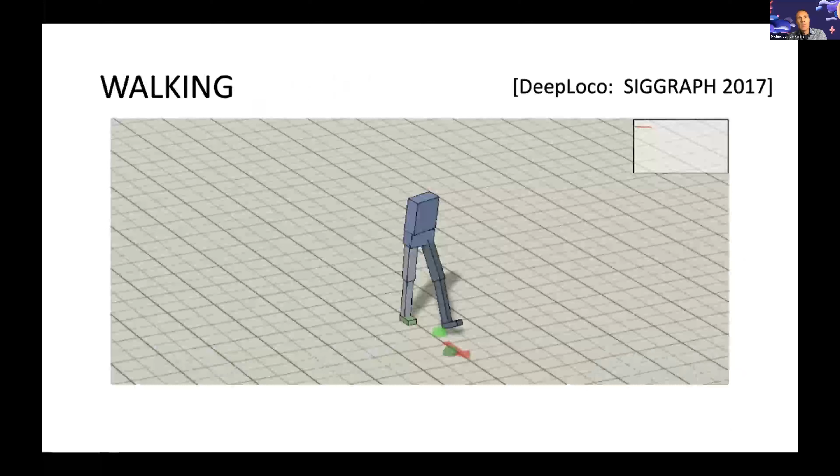This was just a very early test that contained a single motion capture clip of a lower body just walking forward, and I think we also had some data from shallow turns, trying to imitate those objectives. That's part one of the objective, and a second objective is trying to hit these next two footstep locations.

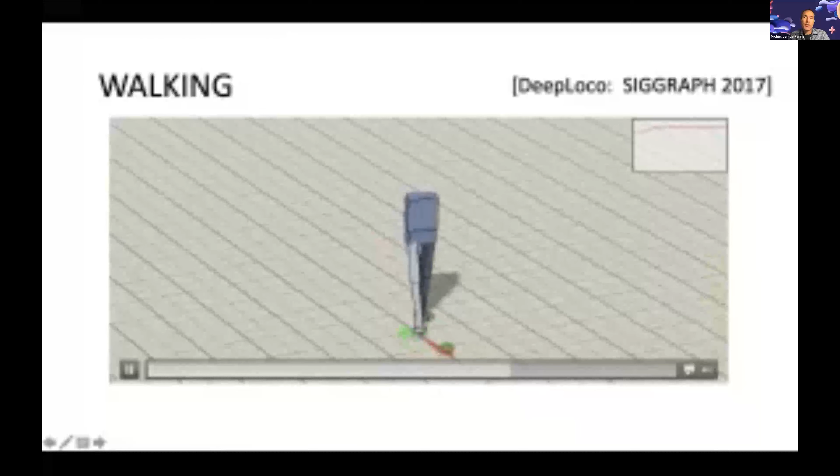And so you can steer this thing. So the task here is to hit the next footstep location, and it's also given access to the footstep location that's two steps into the future, so that it knows if it needs to prepare to turn or prepare to go straight, etc.

So this is already really nice. We're getting some really natural looking walking, and indeed we can put this into interesting environments where it's responding and trying to maintain its balance as it walks over these moving conveyor belts. So yeah, we're really starting to get some interesting behaviors.

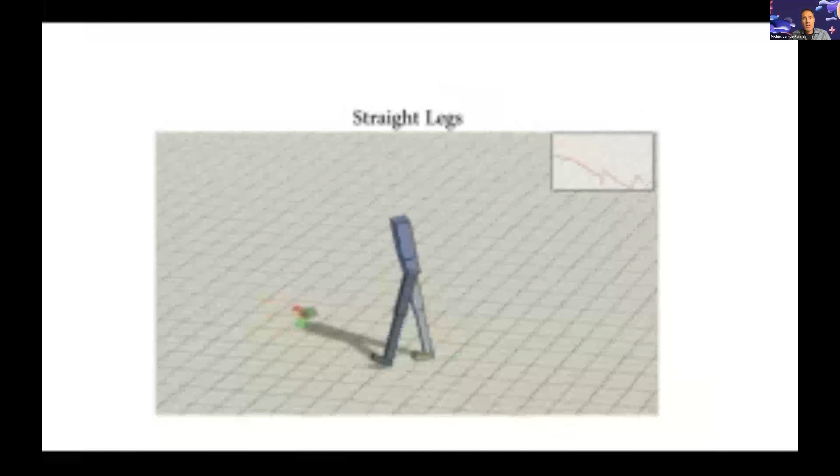We can stylize this. So here we can change the objective target to walking with a straight leg. We're restricting the physics to have one or two straight legs. The nice thing is, as an animator, you can just come up with these constraints, add them to the system, and retrain a new controller, so you can get a variety of interesting motions. So I'm not going to dwell too much longer on this.

A basic question is, okay, does this extend to more complex motions? This is what we did in the 2018 DeepMimic paper, where now we're going to have a state description that is described by a vector of 197 numbers, so it's a more complex full body character. And then the action space is basically a set of 36.

In this case, it'll be controlled with basically PD target angles, but this can also work with torques. And yeah, so you have to produce this set of 36 numbers that controls the actions.

So if you control a motion without a target reference motion, just with a pure objective, then if you're really lucky, you'll get a fairly good looking motion like this. So I would argue that's already fairly realistic.

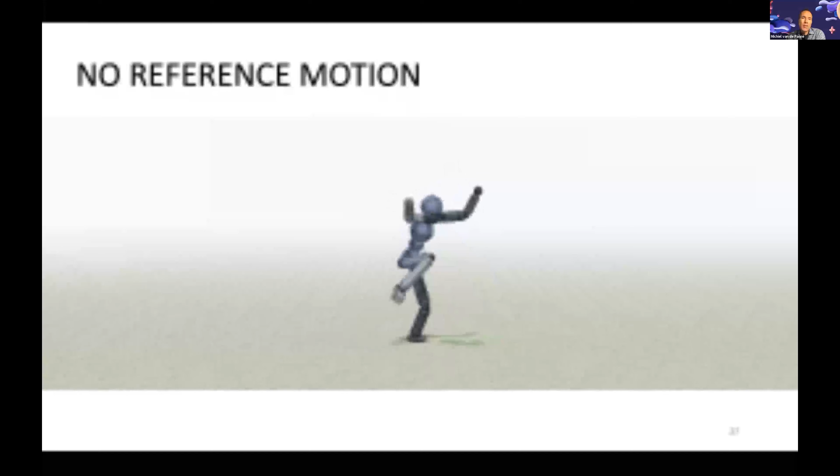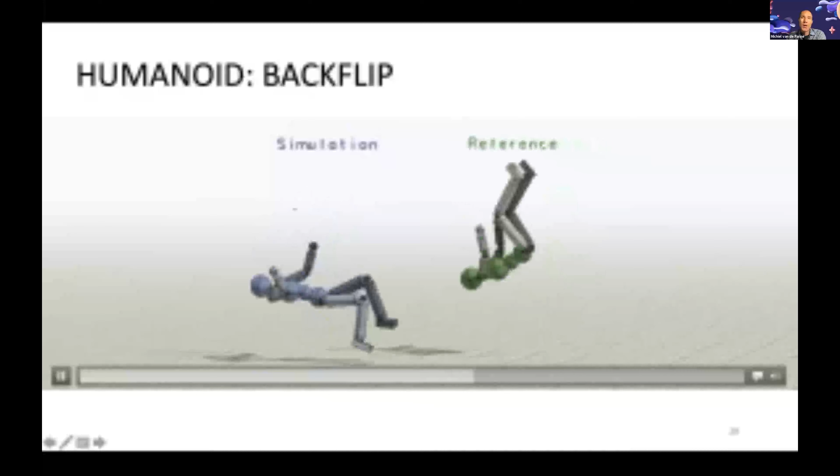But one of the problems we ran into was that for certain types of motions, like a backflip, which is shown in motion capture on the right, it's unable to imitate that on the left. So basically it falls on the ground, and then it's struggling to continue to imitate the backflip while lying on the ground. So it's basically stuck in a local minima during the learning process.

So to fix this, one of the things you can do is as soon as it falls down, you actually stop the simulation, so that it cannot gain further rewards from trying to imitate the backflip while lying on the ground. Because it can still try to imitate the approximate poses of the backflip, and it'll get some partial marks, if you will, for moving its joints in the right action while lying on the ground, but that's not what we want.

So if you do what's called early termination, then you fall into a different local minima. Here you'll see on the left, it's basically pretending to do a backflip, but it doesn't do the backflip, and it goes directly to the landing. It basically says, I hope you blinked, because it still kind of looks like the backflip overall on the right.

So to fix this, we're using something called reference state initialization, where, I don't know if you can see on the top right here, you really want to initiate your simulations at various points along the backflip, so that it really learns how to do all stages of the backflip, and it eventually learns how to connect all these together.

And so if you put these together, then we can successfully do a backflip, and a variety of other really dynamic motions.

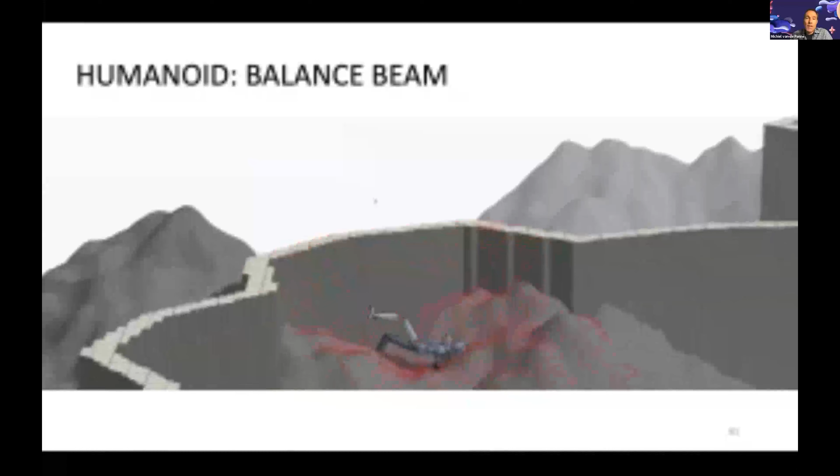We can also condition the policy on a terrain map here. So here it just happens to follow this path, because the only way for it to successfully continue imitating the motion capture data is to follow along this path. It basically always wants to walk straight, but it can't, because it learns that it will fall if it steps off the path.

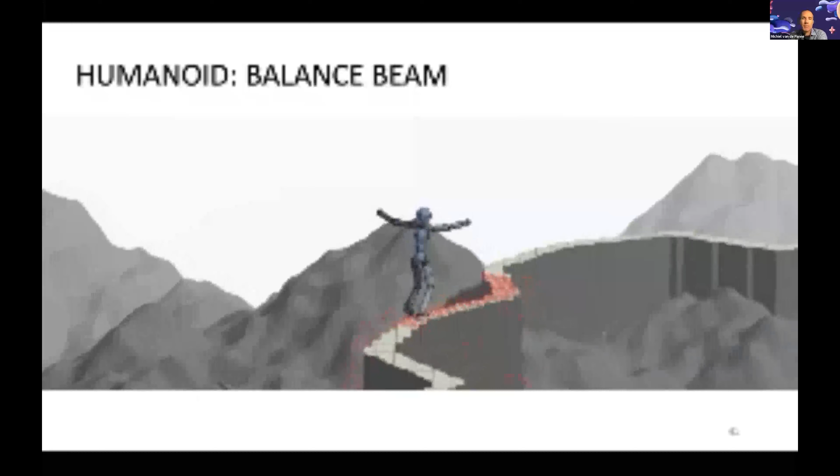In this case, the character can see the path in some crude fashion, but the reason it wants to follow the path is because otherwise it would fall, and therefore it would do poorly at imitating the motion capture data. This is really fun, the fact that we can already come up with smarter versions of these policies.

I think this is what the community needs to do to do a better job of convincing the larger animation community that we can really do interesting character motion in real time, because the simulation is actually fairly cheap to do, and computing the control once the learning is completed, then running these policies is trivial in real time.

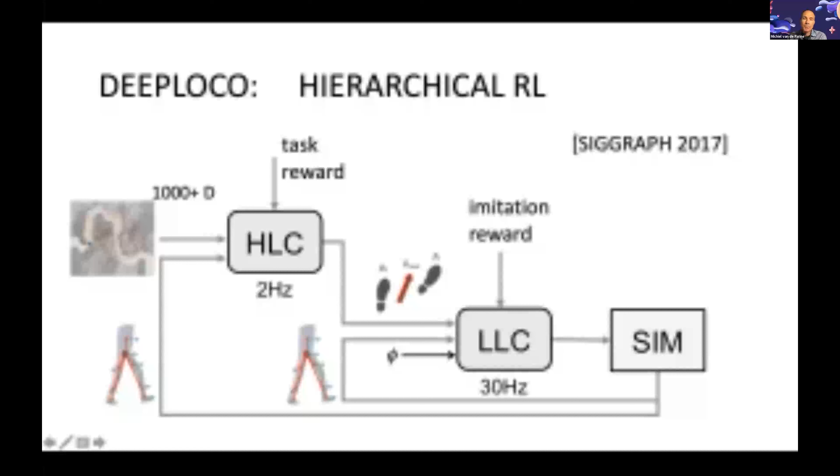And so now, given a map of the terrain or some other task-related goals, it can learn to generate and guide the motion. And that could also be solved using reinforcement learning.

Here, what we're seeing is a simple example of soccer dribbling. The reward is given for the character being close to the ball, and also for the ball being close to a target location. So here, it always walks to the ball, walks around behind the ball, and then starts kicking towards the goal. But remember, the low-level policy doesn't actually know the ball is there - it's just trying to hit these two target footsteps.

And then you can do crazy things - you can replace the ball with a box and see how well the policy can generalize with that, and also switch between different low-level controllers.

All right, so a really fun thing is to see whether some of these methods might actually generalize to real robots. This isn't directly animation per se, because it's a real robot, but it really represents the impact of this motion imitation style work, which has its origins in animation - this comes from the animation community, and is being applied to real robots.

This is a collaboration we did with a company called Agility Robotics and Oregon State University. This is a paper from about 2.5 to 3 years ago, when the work was done.

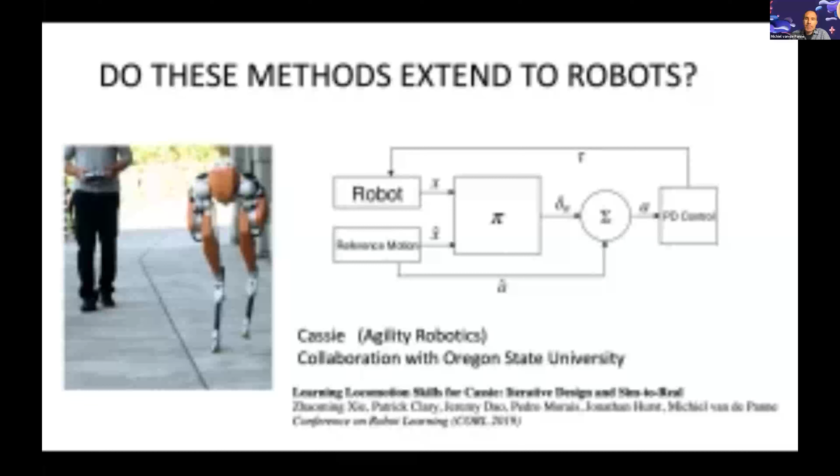A basic question is, how well will this work on the real robots? These are actually some of our first learned controllers for this in simulation, doing some blind walking over different terrain. Agility Robotics and Oregon State provided us with a detailed, fairly accurate simulator for this.

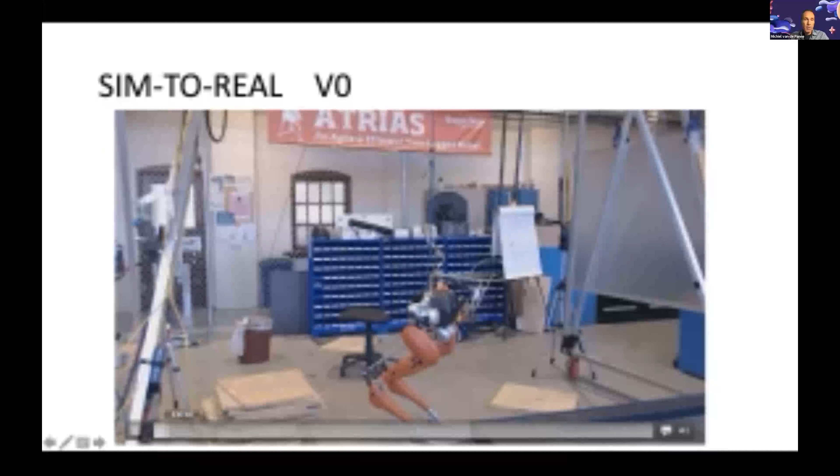So here we are in the Oregon State lab. When we actually tried running this, this is literally one of the first tests of running this on the real robot. And here's what it looks like. As you can see, not very successful.

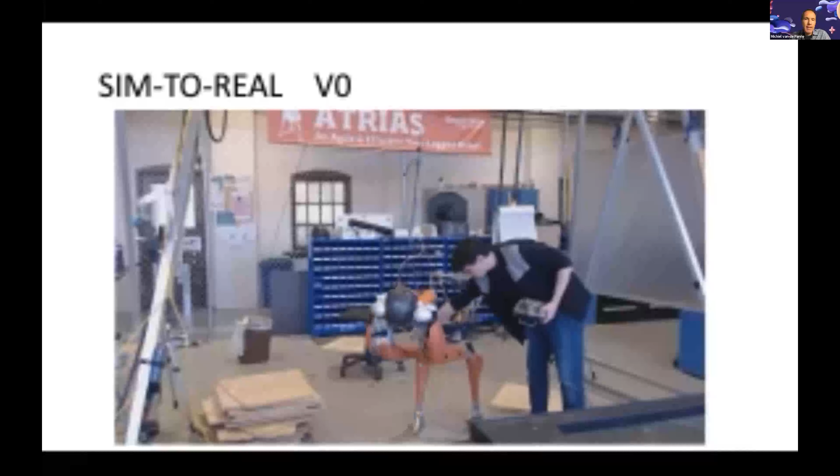You'll see him set up the robot again and again, and it has real troubles. So the first things out of the box did not work, and we had to figure out what the issues were, and I'll get back to describing that in just a second.

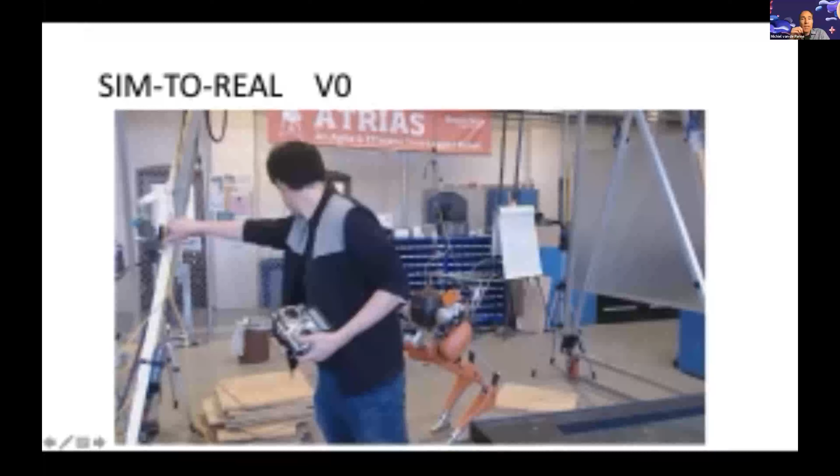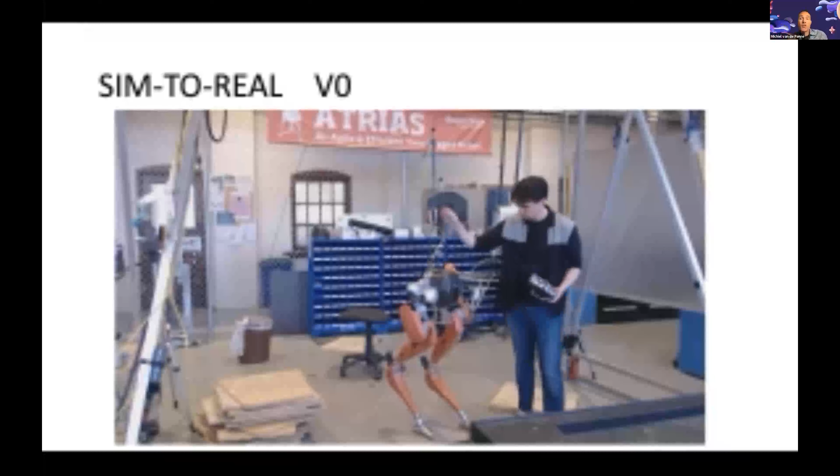It's also interesting to think about this for animatronics and other kinds of robots, because at some point the folks in robotics want to create interesting motions. If you see the latest videos from Boston Dynamics, they're all about dancing and doing other interesting motions, and in many ways, that's what we do in the animation community.

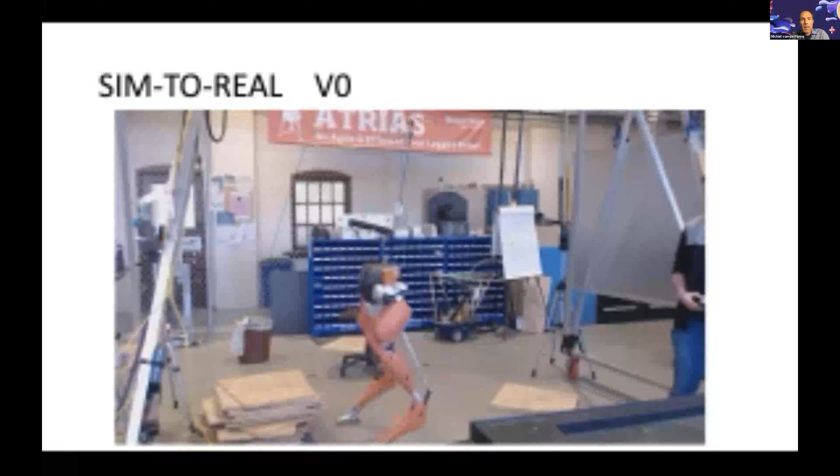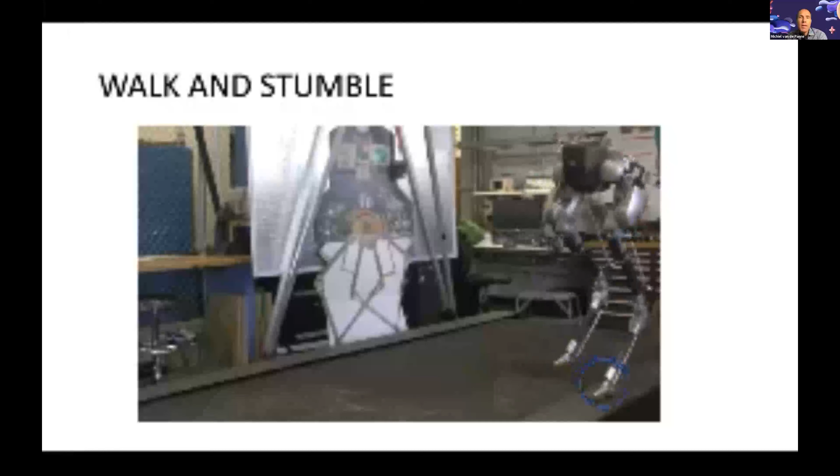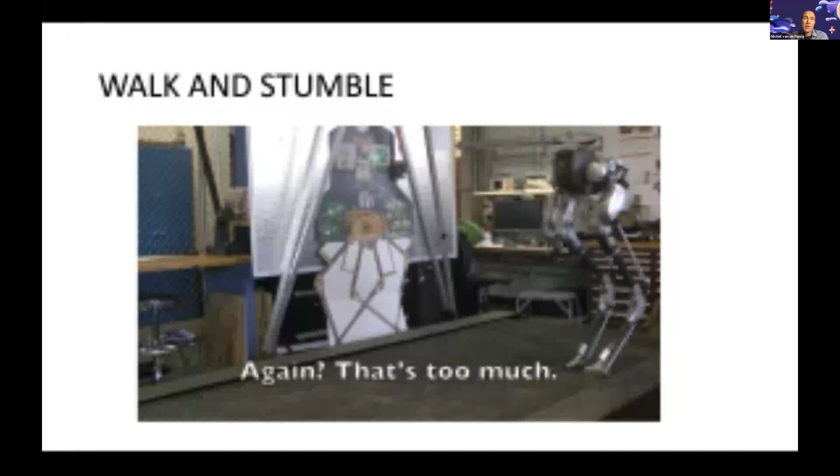So we did eventually figure out what some of the issues were, and this is a deep reinforcement learning based policy, learned purely in simulation and then run on the real robot. Here's this robot walking reliably on a treadmill, and you notice it's actually stepping off to the side of the treadmill and still being robust.

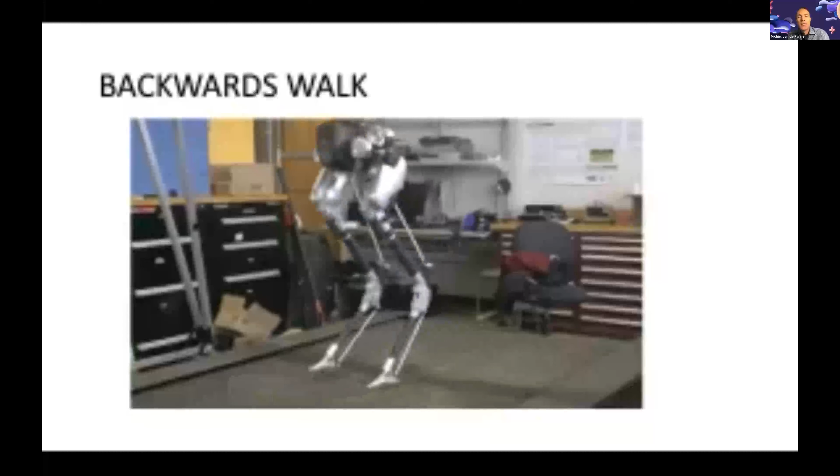We can have it learn to walk forwards, backwards at different speeds. We can have it learn to walk sideways. So yeah, this is neat.

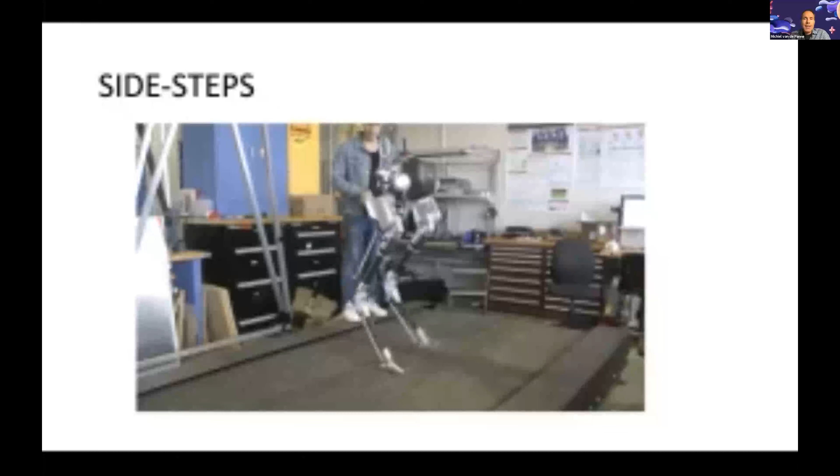I should mention that the reference motion here doesn't need to be a very accurate physics-based model at all. In fact, the reference motion is really more like a crude motion sketch that says, I want the legs to move roughly to the side, or I want the velocity of the body to move sideways. The reference motion itself does not have to be physics-based. That's important to remember, because it gives you as an artist a lot of leeway in just creating motions where you can say, make the stepping motion look more like this.

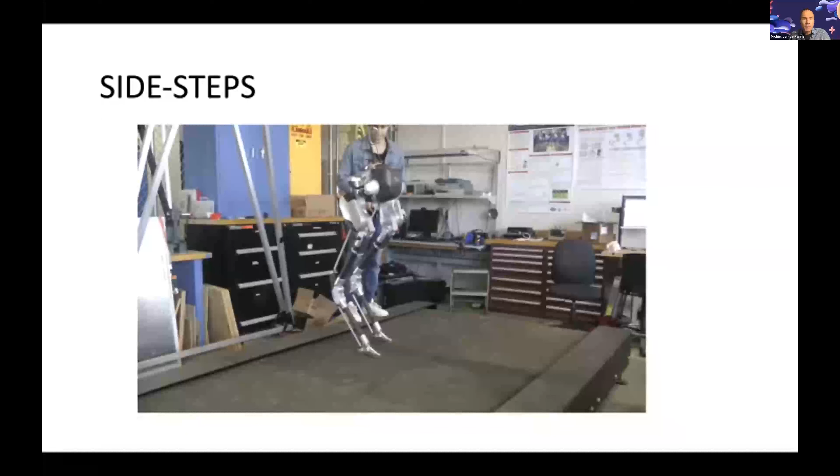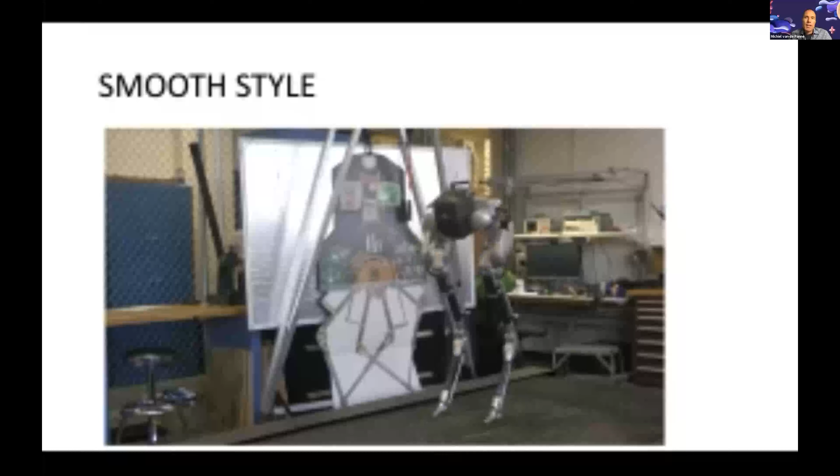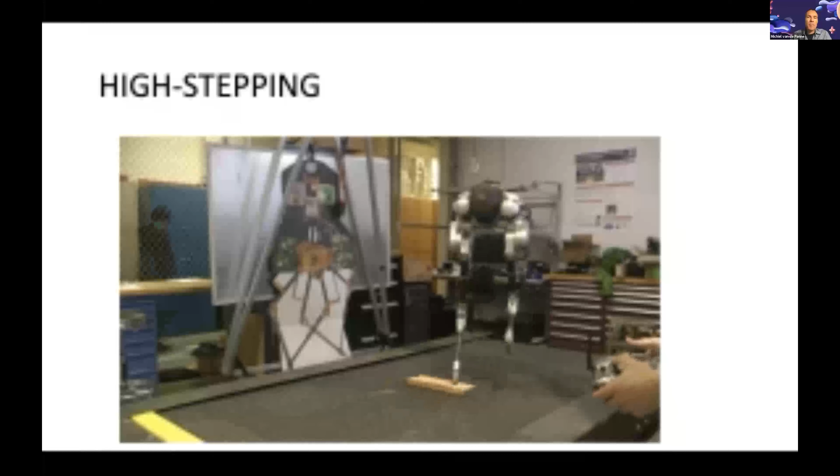Here's another style where we throw in a term to minimize the angular velocities everywhere and accelerations, so we're just trying to create a very smooth motion. Here, to make it more robust, we add some reward to lift the feet higher, so it's doing robustly there.

Here's just a sign of how robust the motion is. We're giving these, again, the robot is walking blind, and it's just being commanded to walk at a certain speed, and yeah, various perturbation tests.

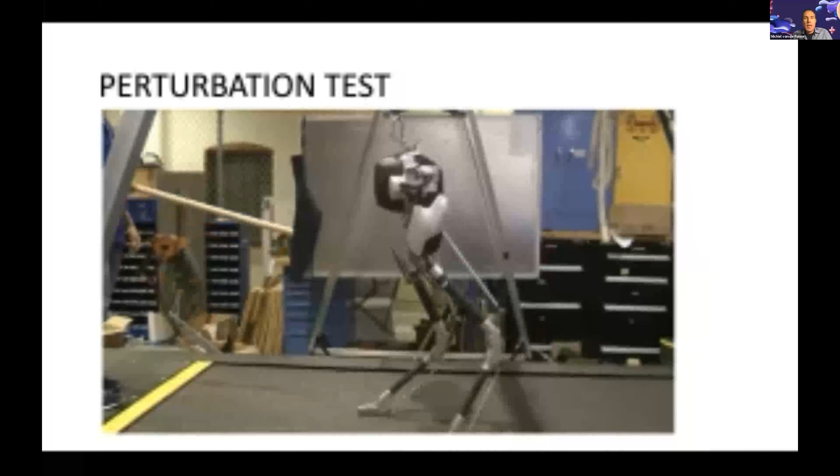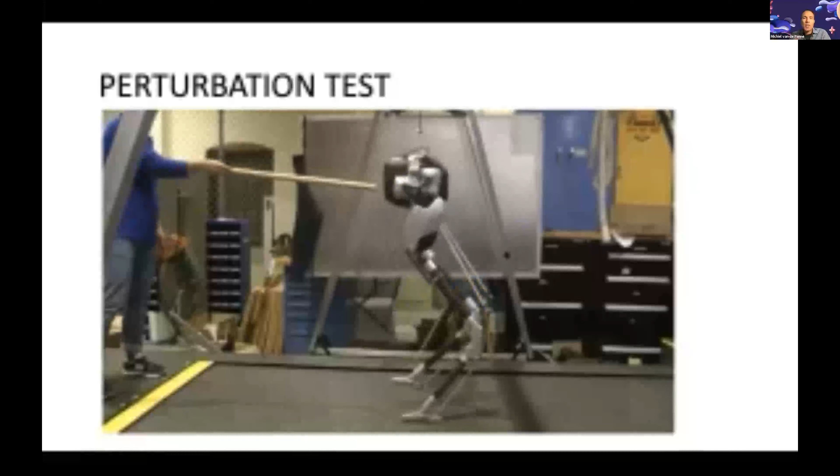In some ways, the exciting thing about this is you could know nothing, you could really not know that much about the detailed mechanics of foot placement and control. It still takes a lot of expertise to set up this procedure, but in the end, the reinforcement learning procedure is a bit of a black box procedure.

So I did say I would get back around to what the difference was between simulation and reality for Cassie, and so to make this work, just a few things: you do need to have a well-calibrated dynamics model, and it turned out to be important in training.

In simulation during training, we have access to the ground truth state of the real position and velocities of the robot, so you'd think that would be the best thing to give your control policy. But if you don't have access to that real state when doing it on the real robot, then it's actually a bad thing to give your policy access to the ground truth state. It's better to use the same state estimator that runs on the real robot, and use a copy of that during training.

That was one of the key things. We also needed to calibrate the delay, since there's always some delay, so you need a model of that, and it needs to be the same in simulation and reality. Together with that, you can get reasonable results.

Another thing we had to do was minimize accelerations of the body. A lot of the early motions tended to produce a small shaking motion, which you could hardly see in simulation, but when you run it on the real robot, you hear it rattling around a lot. Then you realize it's important to create a much smoother motion and to reward that.

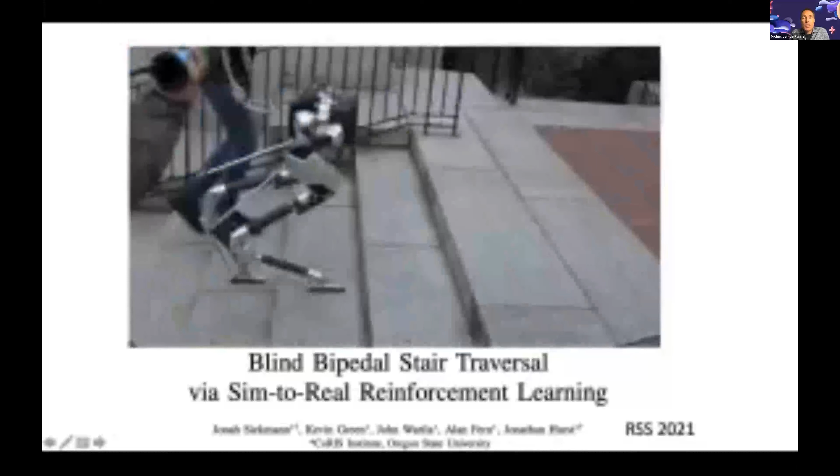It's just being commanded to walk at a certain velocity, but during training it's seen similar environments of stairs it needs to walk up and down, so it knows it might expect a stair up or down at any point. Amazingly, if you train on these blind walking tasks up and down stairs in simulation, this actually transfers onto the real robot.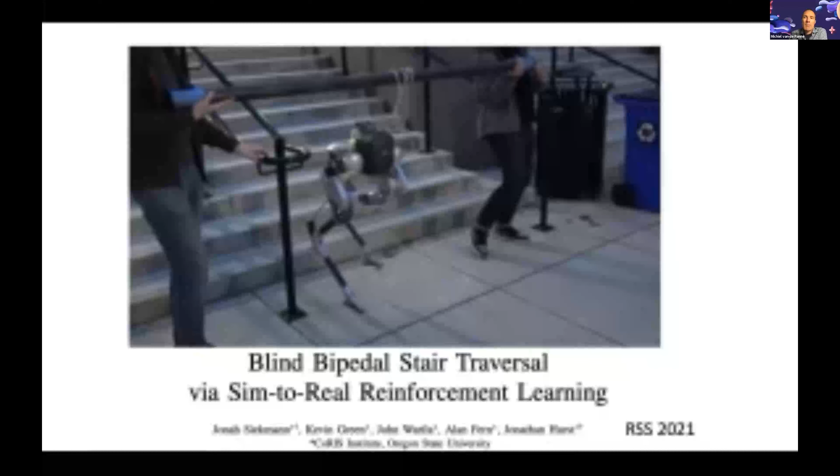I'm not sure if you or I could walk up and down stairs like this blindly. I suspect we could, but once in a while we'd probably sprain our ankles, so the robot doesn't have to worry about that. It's really exciting to see these kinds of capabilities emerge from reinforcement learning processes.

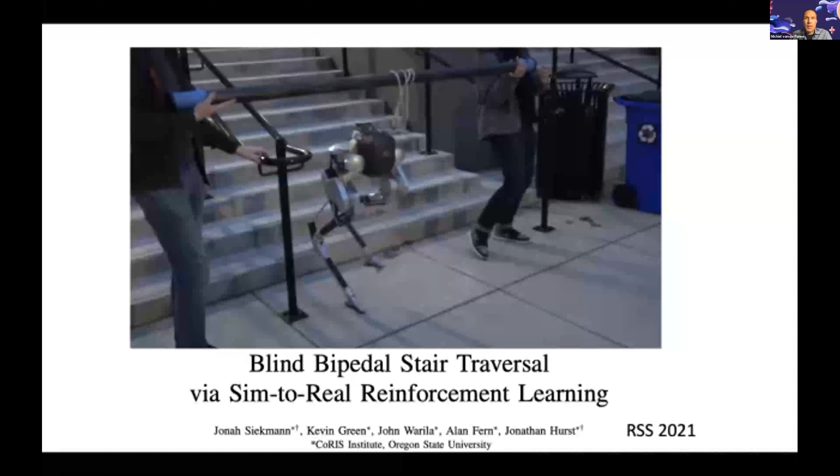What you've seen previously is generally imitating just a single motion capture clip, but you can also imitate more arbitrary motion sequences. All you need is a short window of the future motion — if the policy has a short snapshot of the upcoming motion, say one second into the future, you can build a really good tracking controller that can track a variety of different motions instead of just one clip. I'll show that here.